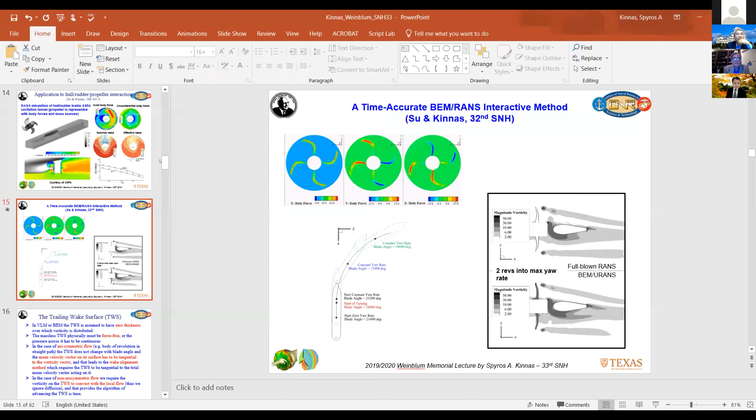Good morning, good afternoon, and good evening, everyone, all hydrodynamicists around the world. I'm very honored to give this lecture. I'm also very honored that I was selected to be the Weinblum lecturer of this year, and I thank the committee for this. Again, thank you for inviting me to give this lecture as well at the SNH.

So I'm going to talk today about the latest work we have done in predicting performance and design of marine propulsors and turbines. I have here the list of students in the last 10 years, about 23 of them. And I definitely appreciate the support of all this work by ONR, as well as the consortium on cavitation we have at UT.

So from propellers to propulsors, as you see here on the top left, we have a single all-type propeller, which started getting wider with skew, then started becoming more like sharp at the leading edge, surface piercing, contra-rotating, stator rotor, etc., ducted, tip loaded, and at the bottom end, at the right, I have a water jet, which is nothing else but another type of propulsor. So we try to model all these types of propulsors.

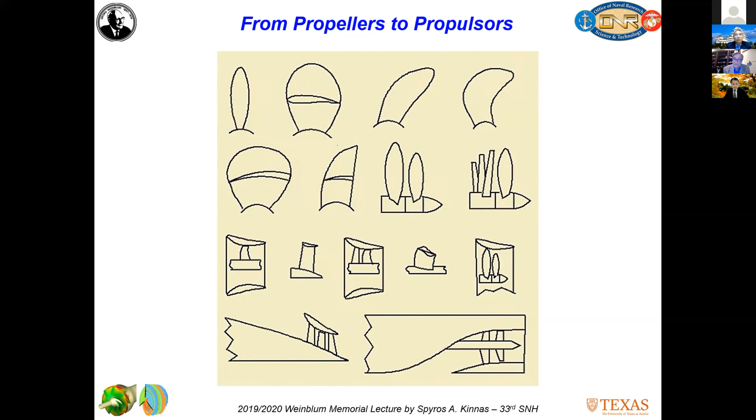Of course, there is a demand from bigger and faster ships, which means bigger, faster, more heavily loaded propellers. Cavitation is inevitable. Therefore, the design has to be balanced between cavitation and propulsor efficiency.

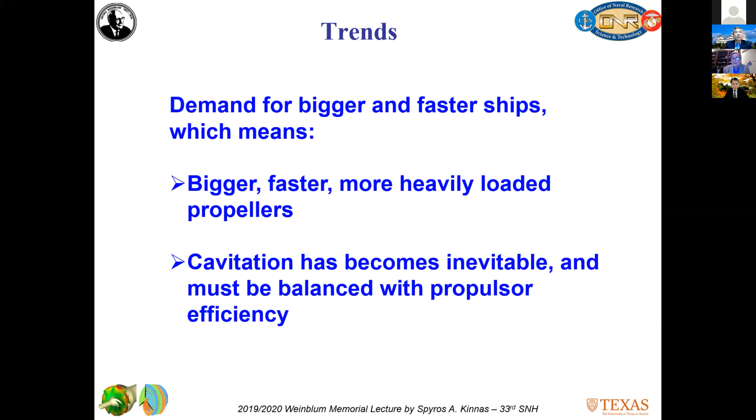So the computational methods that we have been developing, not only us, but everybody around the world, should be able to handle complex blade geometries, should be able to handle on and off design conditions, model all types of cavitation, be fast, because when coupled with design methods, trial and error systematic optimization methods, we have to have a fast tool to be able to turn in designs quickly. Should include interaction with hull or rudder or duct or hub or pod. And finally, the models should be able to predict propeller-induced hull pressure fluctuations as well as acoustic field far from the propeller.

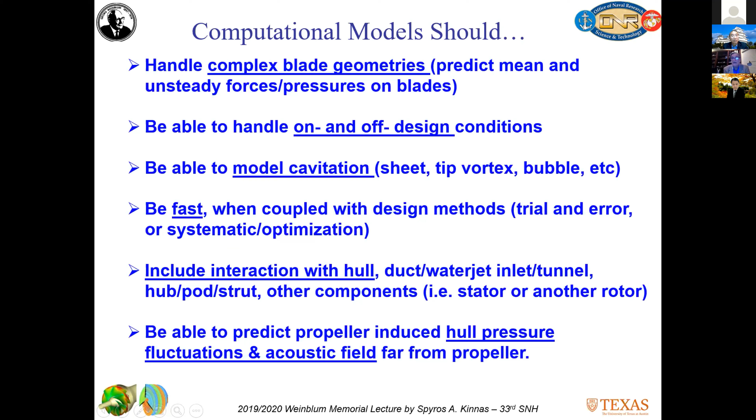So there are many, of course, flow models we can use. And here I list them for a hydrofoil. We have at the top RANS models or LES models. The hydrofoil is somewhere here, and we have to have a large domain so that we have inflow and outflow conditions that are not affected by the body.

We have, of course, boundary element methods where the boundary condition is satisfied on the surface of the foil. We have lifting surface, vortex lattice methods where the boundary condition is applied on the mean camber surface. And finally, we have single vortex where the hydrofoil is represented with a single vortex.

And this is the equivalent of lifting line method for propellers and turbines. On the top, we have a method which is definitely slower and more difficult to grid the space, as opposed to having faster methods at the bottom, which are, in addition to being faster, also easier to model, or to discretize the surface as opposed to the volume.

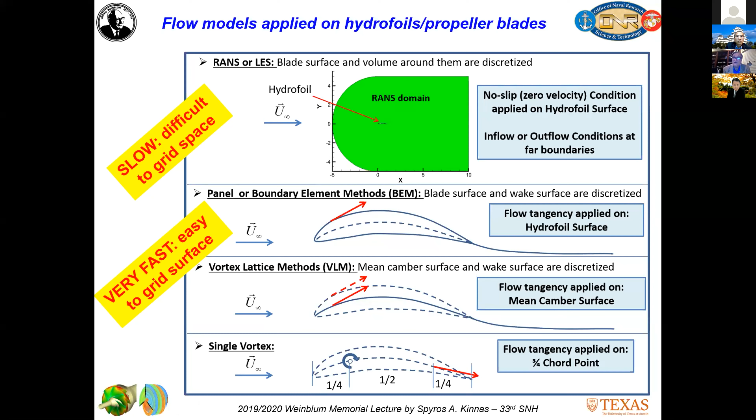So going down, I have here propellers on the top left, modeled with a vortex lattice grid, and we solve for the bound vortex of those boundaries that you see. Then the boundary element method, where we panel the blade, and we solve for the perturbation potentials, which are equal to the dipole strengths on the panels.

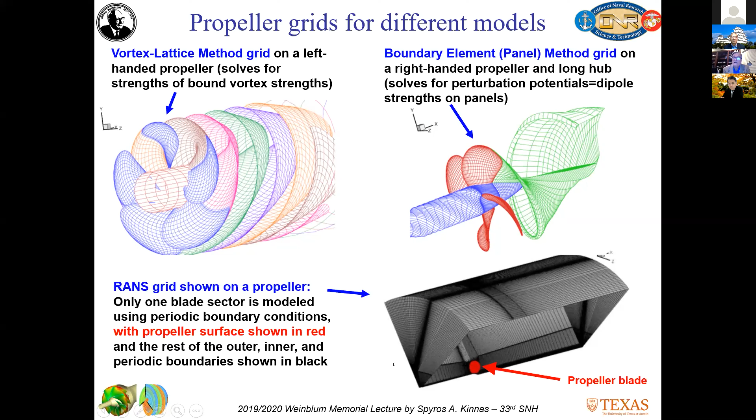And at the bottom, I have RANS, which solves for all these primitive parameters, velocities and pressure. In this case, you see a propeller in red, and you see the grid around it, which has to extend quite some distance in all directions so that the far stream conditions are not affected by the propeller. This is showing only one blade by using periodic boundary conditions.

Now, the advantages and disadvantages of the methods: the surface methods are inviscid, and the effects of viscosity need to be accounted for either by semi-empirical adjustment of the pitch and application of a friction coefficient, or via coupling with an integral boundary layer solver. In addition, vortex lattice methods do not include the effect of thickness, so a thickness loading coupling needs to be applied to make them closer to the boundary element method.

Of course, the finite volume or RANS and LES methods include the effects of viscosity inherently, but you have to be sure that you have enough resolution within the boundary layers that are developing due to the effects of viscosity.

Surface methods, panel methods, or vortex lattice methods need to approximate or determine the trailing wake surface, the surface of the wake, by using a wake alignment model. Finally, RANS and LES do not need to model this trailing wake surface, but in order to get it right, you have to make sure that you have enough resolution downstream of the propeller in the wake. That not only helps determine where the right surface of the wake is, but also helps reduce numerical diffusion.

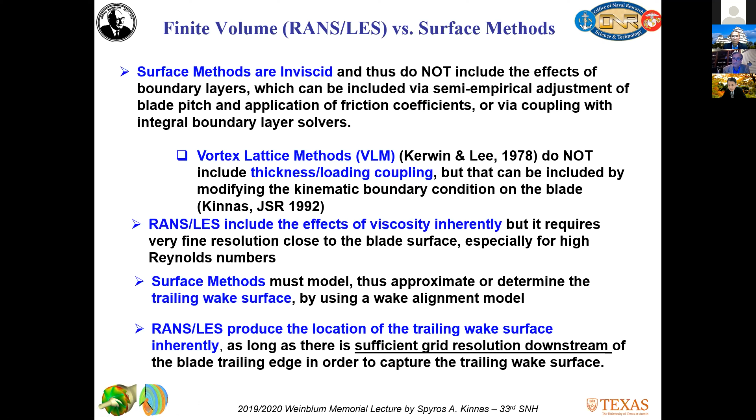So going down the list, in the boundary element methods that I primarily am going to present here, to solve the flow and evaluate the performance of a propeller, we need to know what the inflow is. Often the propeller inflow is measured or evaluated via CFD or via RANS.

This needs to be known behind the hull at the propeller plane in the absence of the propeller, and this is what we call the nominal wake. However, due to the hull-propeller interaction, in the end, we need to evaluate the so-called effective wake.

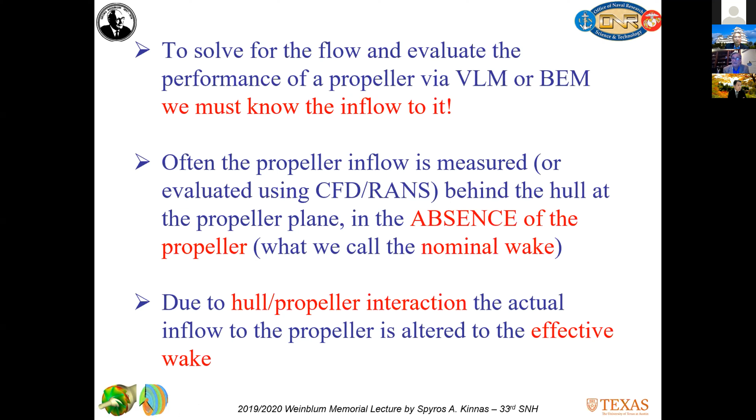For a simplistic understanding of why we have to evaluate the effective wake, assume that we have a non-uniform inflow coming with vorticity into the propeller blade. At point A of the propeller, the inflow would not be the one just upstream at point C. Due to contraction, it would be the flow somewhere above point C, at point B. Therefore, the effective wake is going to be different from the nominal wake. Again, this is a simplistic view.

And here comes a general definition of the effective wake: effective wake, on the left, is equal to the total wake, the total inflow, including the effects of propeller inflow, everything, minus the propeller induced component. So this is how we are going to evaluate the effective wake.

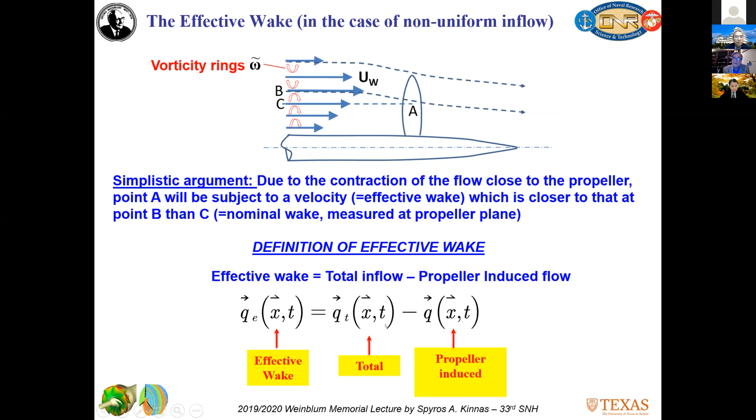So going down the list, before I show you any details, I want you to see the importance of having the effective wake. Here we have this propeller, I think it is 5168. And here we have a nominal wake shown on the left like this. On the right, I show the effective wake after an evaluation of that, as I show you in the next slide.

So the KT and KQ are first predicted by using full-blown RANS, then by using BEM with a nominal wake. You see that using a nominal wake, the KT is going to be 13% in error, and the KQ 11% in error. By using the correct effective wake, we're going to have a much smaller error, in this case less than 1% compared to RANS.

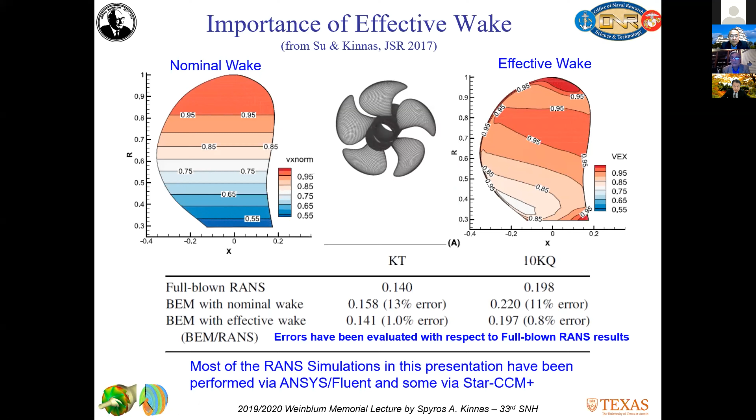So how do we evaluate the effective wake? As I said, this is the general formula we use. And this is a flow chart that shows how this is done.

We start with an initial guess of the effective wake field. Based on that, the BEM or vortex lattice method gives us the propeller perturbation flow, as well as the mass source and body force. With this body force, we run with sources equal to those body forces.

This run gives us the total velocity. Then by subtracting the propeller induced velocity from the total velocity, we get the effective wake. And of course, we go around that loop until convergence.

In order to properly evaluate the effect of the propeller within RANS, the propeller pressure forces need to be converted into body forces, and the propeller thickness needs to be converted into mass sources. Also, in this approach, we use time-averaged forces and sources to expedite the simulation.

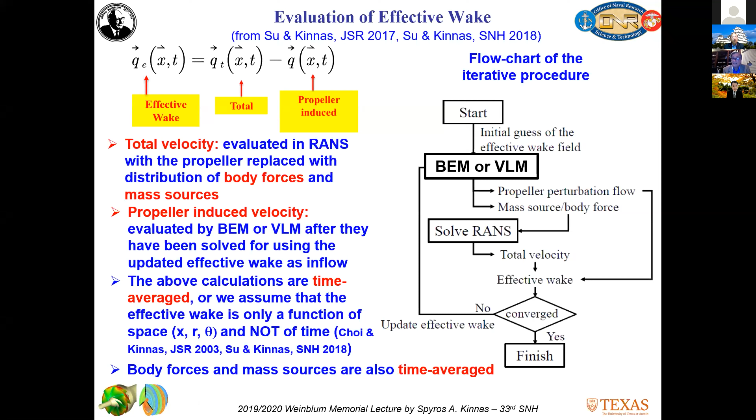Another important thing is where you evaluate the effective wake. Traditionally, we evaluated it somewhere upstream of the propeller blade, but most recently we decided the best approach is to evaluate the effective wake at the propeller control points, as shown here.

This is a case of a ducted propeller where the duct and the hub are handled using RANS, and the propeller is handled using a boundary element method. You see here where the propeller is, and here you see how the propeller is modeled with body forces within RANS.

What I show at the bottom right is the performance from experiment. As predicted, if we evaluate the effective wake somewhere upstream of the blade versus at the control point, you see that using it upstream of the blade, we definitely miss a lot, as opposed to evaluating it at the control points, where the simulation is much more successful. That is one lesson to learn from this.

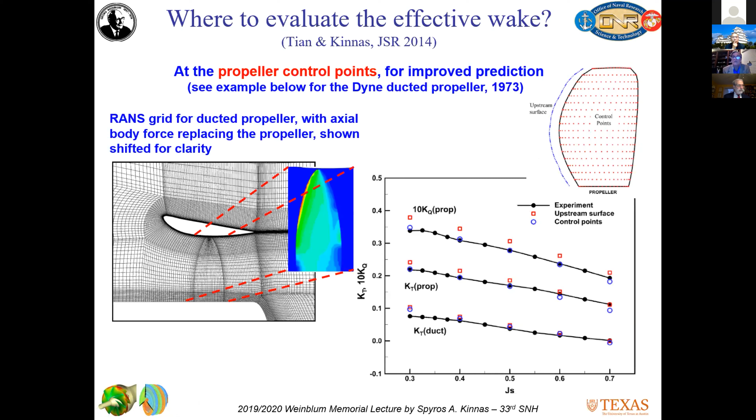We have applied that in the case of podded propellers. As you see here, two podded propellers, front and back, and here you see the body forces, the mass sources, the axial body force, and the circumferential body force. I wanted you to see at the bottom where we show the swirl velocity.

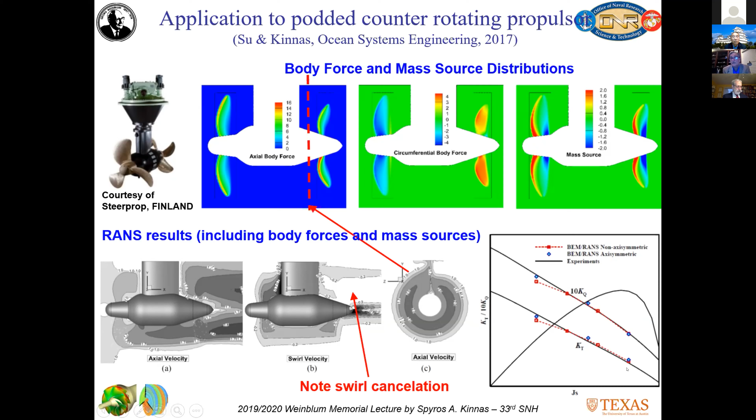It's a little hard to see, but the swirl downstream of both propulsors is quite minimal, meaning this is a good design, because downstream you want the smallest swirl so you get the best efficiency out of this podded propulsor. Here it shows the KT and KQ as compared with experiments.

Then we applied this in the case of a propeller working with a hull and a rudder, as you see here. We made comparisons of this with an experiment performed at SSPA, where they put this model inside the SSPA tunnel, a cavitation tunnel.

Here I want you to see the axial force and circumferential body force as predicted from the method, and also the nominal wake and the effective wake. I want you to see how different the two are from each other. Finally, the KT and KQ of the propeller are compared with those measured at the SSPA tunnel.

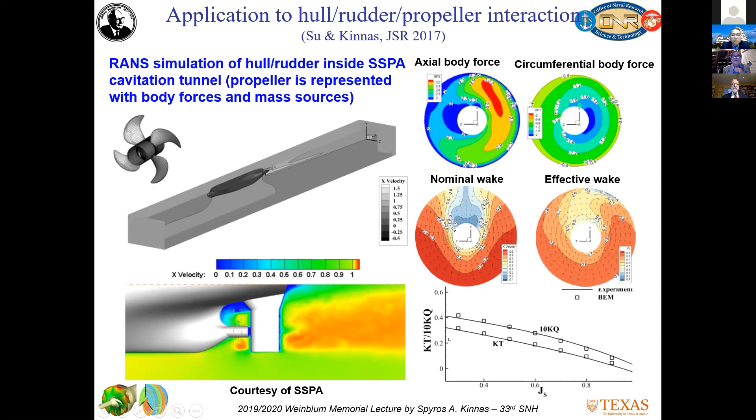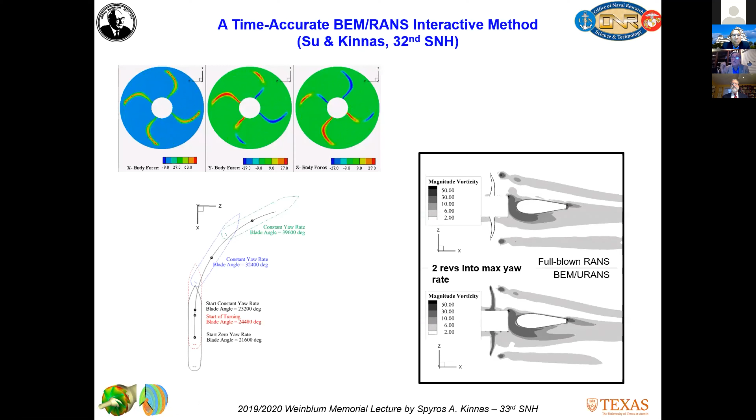This is in the case of a hull in maneuvering. Here we show the flow, the vorticity, around the rudder and propeller, behind the propeller, from full-blown RANS at the top, and underneath from BEM representing the propeller coupled with unsteady RANS. Our simulation seems to very well reproduce what would happen with the full-blown RANS, where RANS, unsteady RANS, actually applies to both the propeller and the hull.

Going down this, as I was saying earlier, the trailing wake surface is something that needs to be evaluated. Of course, the trailing wake surface has zero thickness. Since it is massless, it has to be force-free.

In the axisymmetric flow, we have to make sure that the mean velocity vector and the surface of the wake are tangential to each other. And in the case of axisymmetric flow, again, with the propeller, the velocity induced in the wake and the surface have to be tangential to each other.

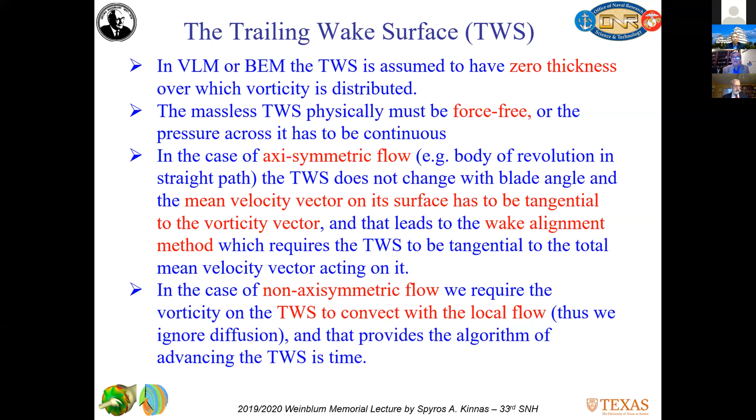In non-axisymmetric flow, of course, we require the vorticity to convect with the local flow. And we have done both of these, and I want to show you how important it is, first of all, to have the right wake. This is shown for a propeller.

I think this is 43, 48, if I remember correctly. This shows the performance, KT, thrust coefficient versus advance ratio, predicted from experiment with the crosses, from RANS in yellow, and from using full wake alignment versus using approximate wake alignment with an older method. And you see definitely you have to have the right location of the wake to get the performance right, as opposed to having an approximate model.

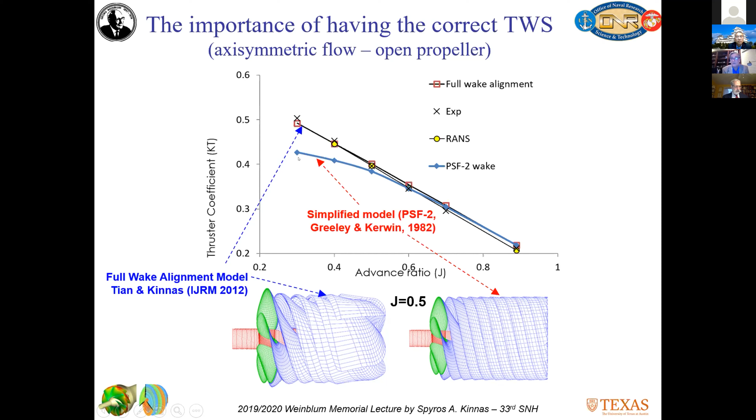So again, this is something we show even more pronounced in the case of ducted propellers, where if we align it using the propeller wake and all the technologies, the experiment is down here, and also RANS, using the full wake alignment. And here, if we use the simplistic alignment models for KT and KQ, as you see, we miss a lot by not using full wake alignment. So it is very important in the case of ducted propellers in particular.

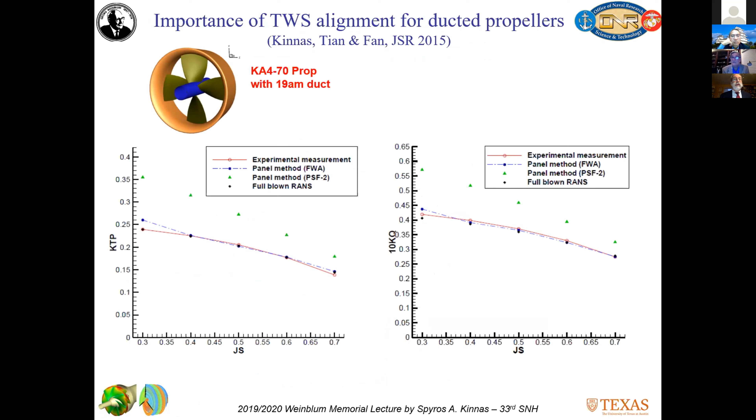And in fact, we push this model even further, where not only do we align the wake of the blade, but also the wake of the duct. I want you to see the dark lines here, showing how the wake alignment scheme from our method is able to predict the roll-up of the vortices. And as you see, it matches very well the location of the vorticity shown in color as predicted from RANS.

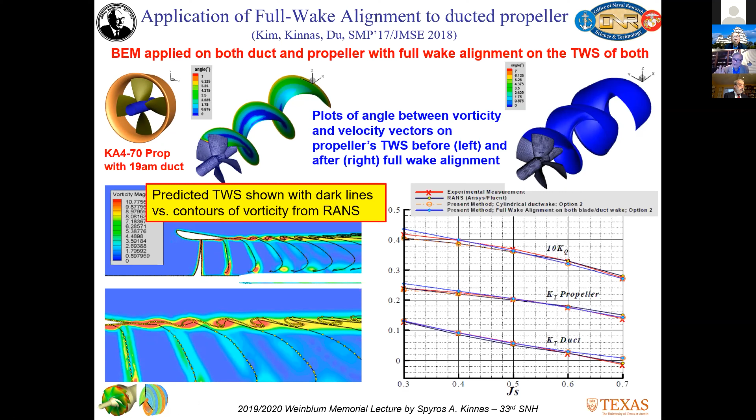And of course, the performance here from all these models, KT of the duct, KT of the propeller, and KQ of the propeller, are all predicted, I think, very well with all these models. So again, this is something important to emphasize one more time: having the right, effective location of the trailing wake is an important aspect in all these models.

And we did that in the case of a propeller in inclined flow, 10 degrees in this case. You see here in black, it shows the vorticity as the wake location predicted from our method versus the vorticity plot coming from RANS.

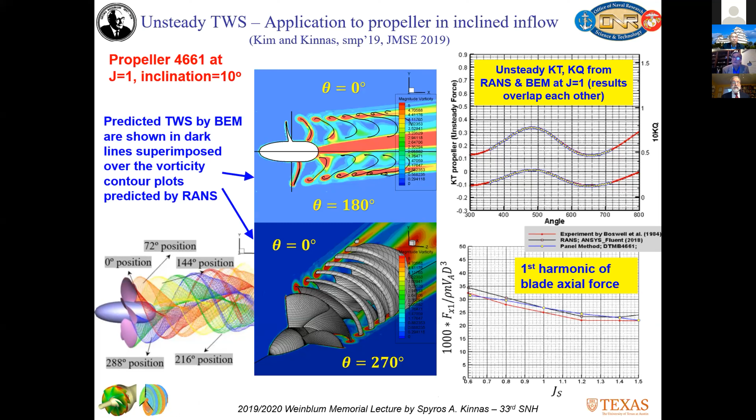This shows again the flow, and on the right, it shows the KT predicted from RANS and from BEM, which is going to be unsteady because we have non-uniform flow. And I want you to see how well RANS and BEM agree with each other. And of course, finally, they also agree with experiments where we look at the amplitude of the first harmonic of the axial force. So we're very happy to see this.

And finally, it is important to include the effects of boundary layer as well. We have done that by coupling the method with XFOIL, but a modified XFOIL, where XFOIL, of course, is a two-dimensional method. The way we applied it, we took all the influence coefficients of XFOIL at a blade section and replaced them with three-dimensional influence coefficients, in other words, three-dimensional sources and dipoles.

But this is not enough. We also had to take into consideration the effects of the other sections on the blade, as well as other sections on other blades. And all of that, of course, helped us achieve better correlations.

Here, the top figure on the right is a little hard to see, but essentially this tells you RANS, full wake alignment with boundary layer, full wake alignment only, and simplified wake alignment with boundary layer, all these approaches. In the end, as you see down here towards the trailing edge, this is a blow-up of this. You can see from here that the most successful of all is when we have full wake alignment and boundary layer corrections together.

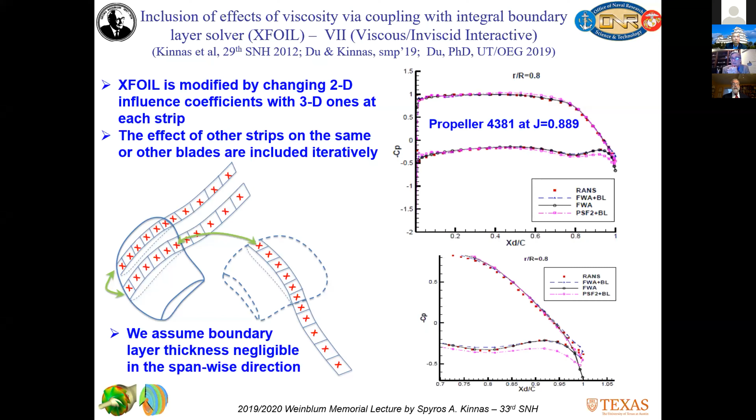So again, all of these things show that having the wake right and having the effects of boundary layer, using this sort of three-dimensional scheme where you take into account the boundary layer sources on other sections and on other blades, is the best approach. And here I show you, for one more time, two other propellers, 4381.

RANS is shown in red, and here shows full wake alignment plus boundary layer in blue, and all simplified wake alignment with boundary layer. Obviously full wake alignment with boundary layer is more successful.

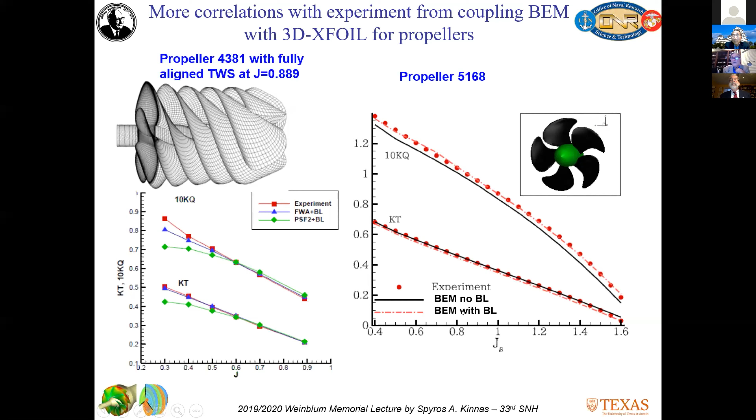Here also is shown for propeller 5168, where the experiment is shown with red dots, boundary element method with no boundary layer is shown in dark line, and in red line, boundary element method with boundary layer corrections. Obviously this is the most successful of all.

Then I'd like to go quickly into a new extension we have made in our panel method in order to handle not only sections with sharp trailing edge, which is often the exception rather than the rule, but also sections with blunt, non-zero thickness trailing edge, round trailing edges like that, or trailing edges like that used for anti-singing. So how do we do that?

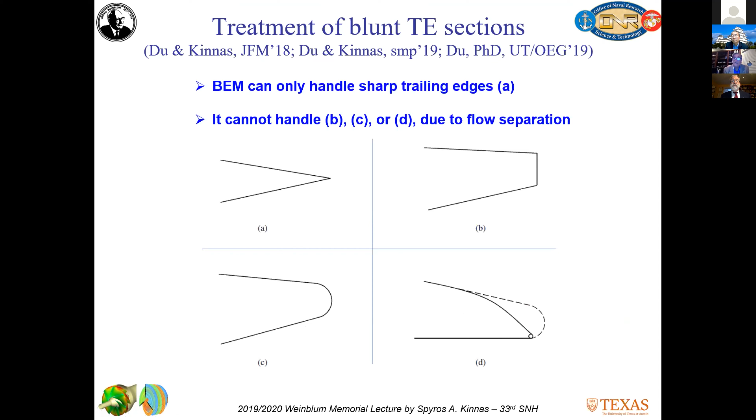Through a Newton-Raphson scheme, Newton's second scheme, we are able to impose the following conditions. First, we want the lift of this extension to be 0. Also, we want the moment of this extension to be 0, which is one way of saying that the pressure distribution over this extension is constant, something verified by RANS runs and also in experiments.

Then points A and B are determined via coupling with XFOIL, the boundary layer code, where we make sure that the CF at point A and point B is equal to 0. In other words, where we have separation, where CF is equal to 0.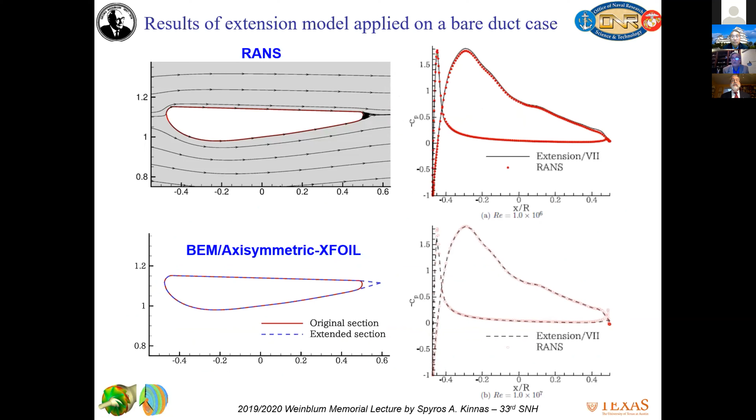Here it shows the pressure distribution at the top for Reynolds number 10 to the 6 and at the bottom 10 to the 7. You see the correlation is very good between the pressure distribution from our method and from RANS. So we were very happy to see this.

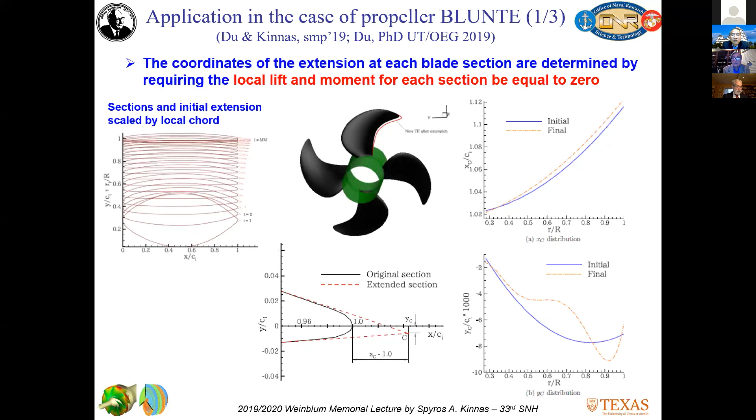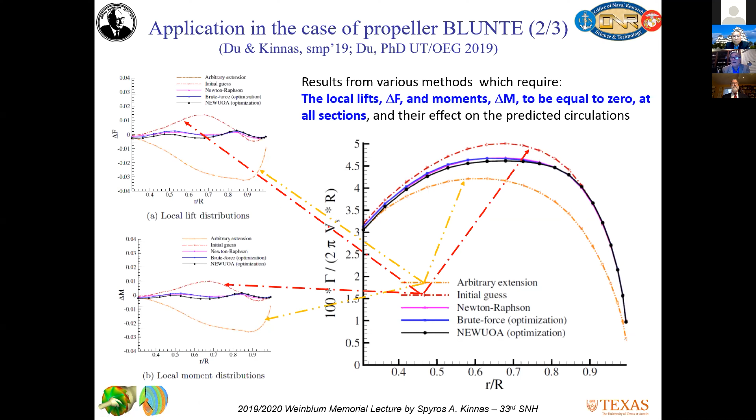I should tell you, we have to be very careful with this blade. These blade sections with round trailing edge are difficult to model in any type of method we use, even within RANS. Because as I told you earlier, you have to make sure the trailing wake is modeled properly. In this case, since we use an O-type scheme, it's very hard to have a trailing wake modeled sufficiently at a sufficient distance from the trailing edge.

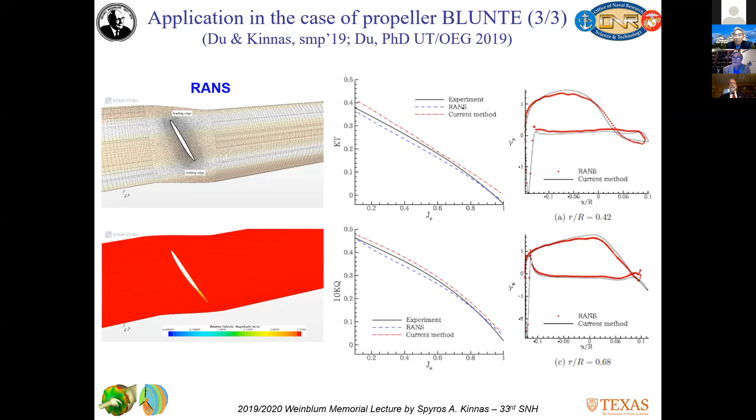So again, using Star CCM Plus and our method, we have here the KT from experiment in a solid line. The current method using this extension scheme is a little bit above; RANS is a little bit below, and the same with the KQ. Here it shows the pressure distributions from RANS and from our method. Again, they are not on top of each other, but they are close enough. I think more work needs to be done to make sure we get closer to the experiment from both methods.

So then I'd like to go further into how we model the effects of cavitation. We model cavities with boundary elements, with panels, and we require the pressure of the cavity to be equal to vapor pressure. The method is able to determine unsteady cavity patterns, fully unsteady, not quasi-steady. And the method allows for mid-chord cavity detachment, as well as cavities on either or both sides of the blade.

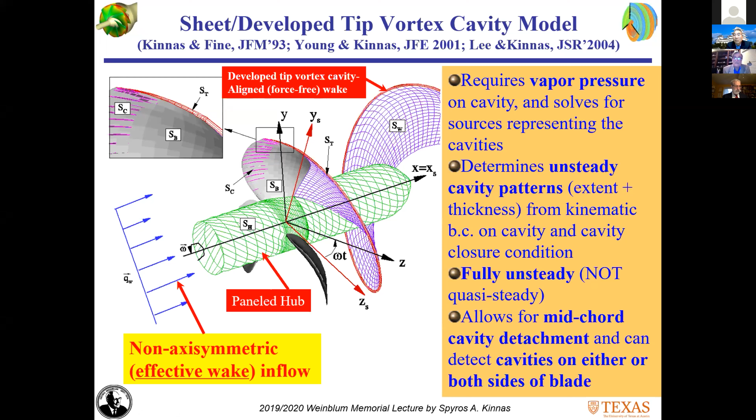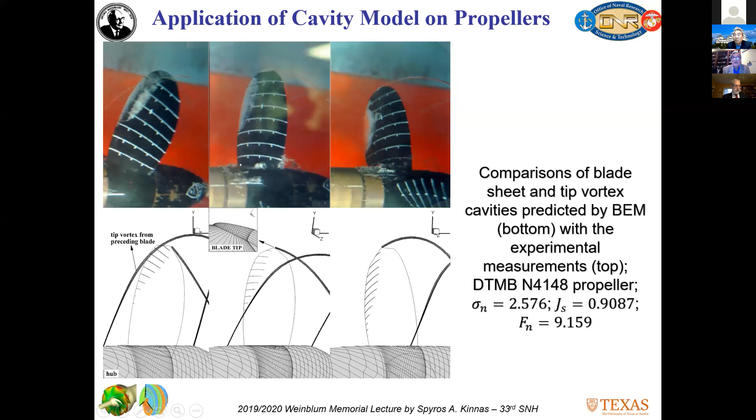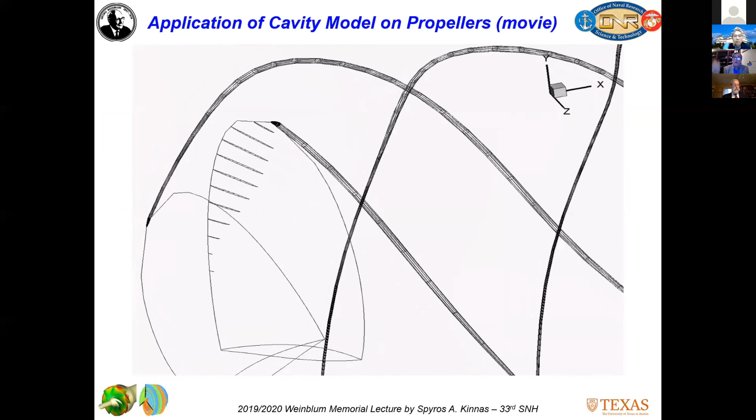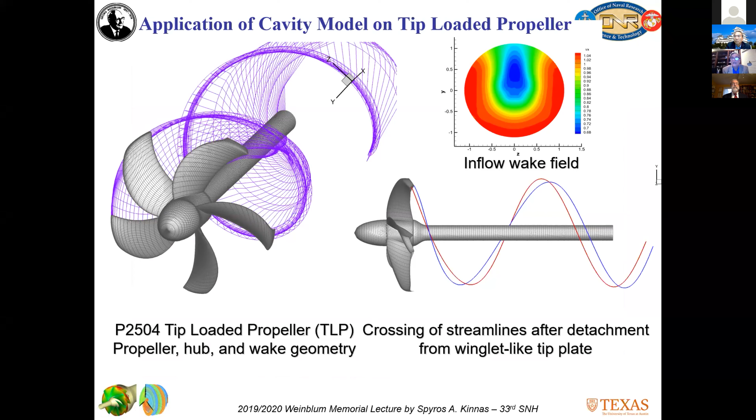So let me continue from this. We have applied this to tip-loaded propellers. I wanted to show here, we have two vortices coming from the knuckle of the tip-loaded winglet, and from the tip of the winglet, like that.

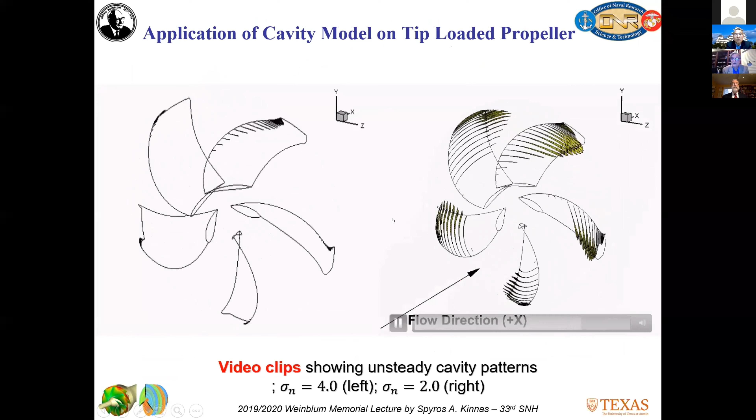And here I have again some movies that show you the predicted cavitation at a higher cavitation number on the left and a lower cavitation number on the right. Let me continue with this.

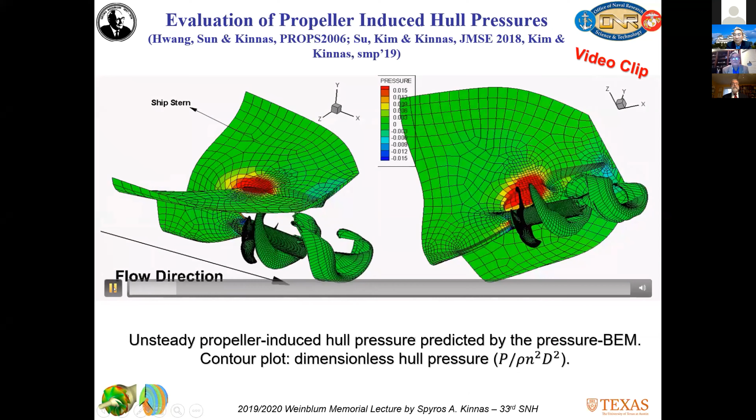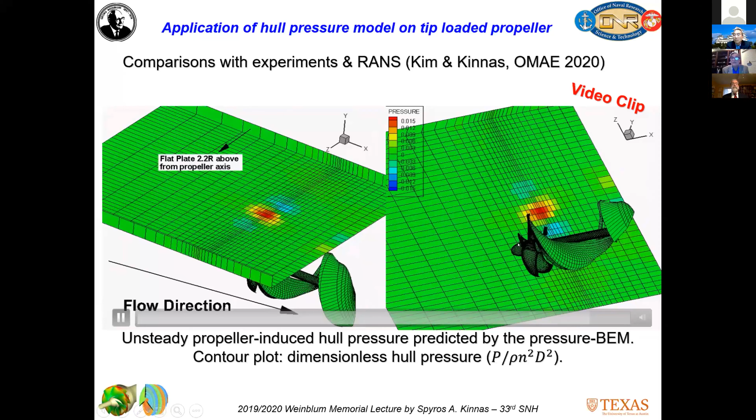This shows prediction of the pressures on the hull, and I wanted to see how well the wake of the propeller is modeled on this. So I'm going down here. This is now for a plate, propeller-induced pressures on a plate. And you see the tip-loaded propeller in this case under it. That is an experiment performed some years back.

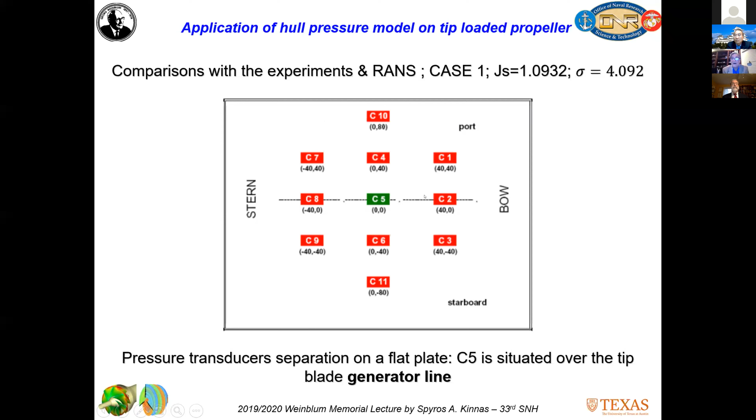In the next slide, I want you to see at all these points on the plate, this point in green is the point just above the propeller, and these points are towards the stern, and this is towards the bow. In the next slide, I'm going to show you predictions versus measurements of the induced pressures on the hull.

In red, you see RANS. In black, you see BEM. And the experiment is shown with circles. I think I find this a successful correlation, both for BEM and for RANS.

So then we were very happy to see this. Again, this is shown for all the points.

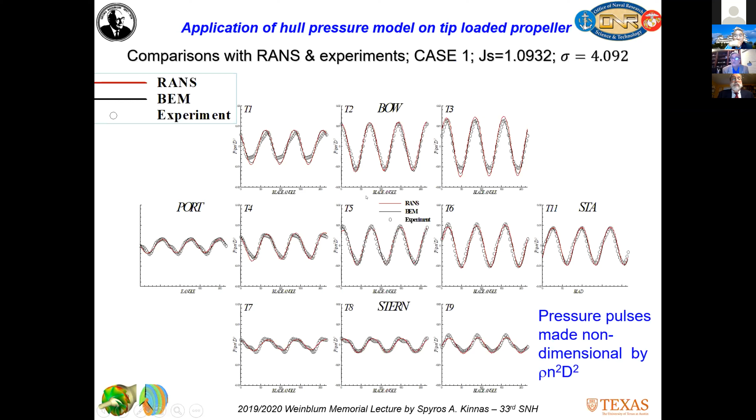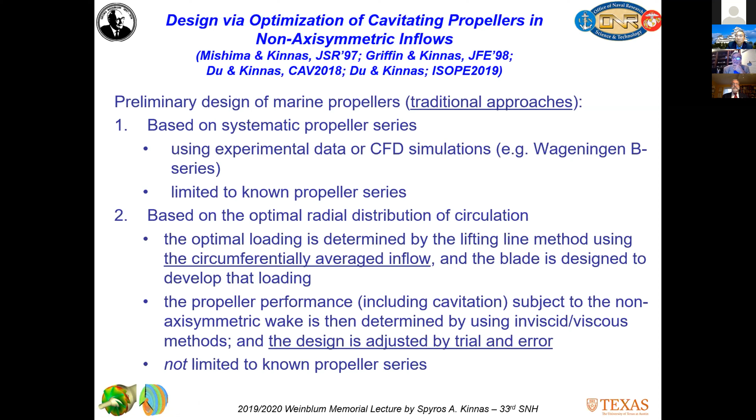Now I would like to go very quickly through how we have used that in optimizing a propeller - in other words, design via optimization. This is something we have carried out long ago. Our approach here, instead of using systematic series like Wageningen or other types of series to design propellers, or more sophisticated methods that use lifting line method to design the propeller blade loading and then design the blade geometry to adjust to that loading, we use a different approach: actually designing the propeller in the actual inflow, where the circumferential variance of the inflow and the effect of cavitation are considered within the design process, not after it. There is no need for trial and error, okay?

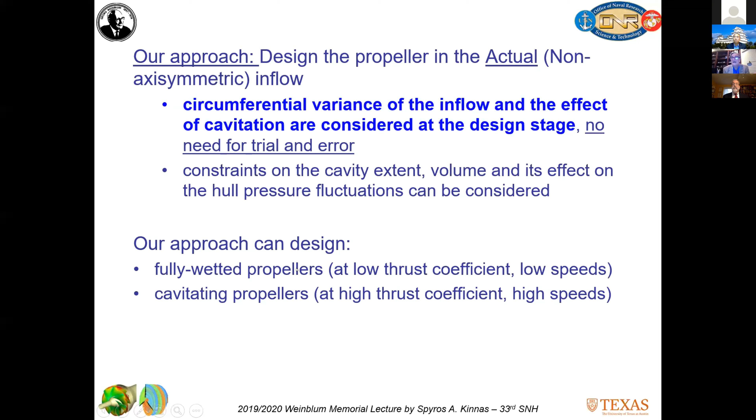And we can put, of course, constraints on cavity extent, volume, and its effect on the hull pressure fluctuations. Our approach can design either fully wetted propellers at low loadings or cavitating propellers, and I'll show you examples in just a moment. How do we do that?

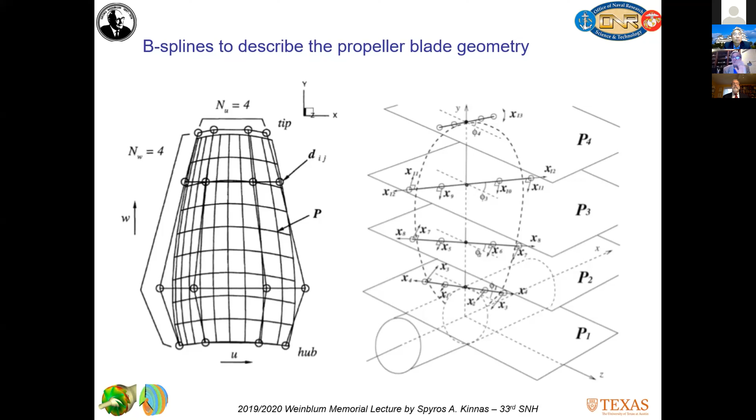Well, we model the propeller with a B-spline polygon, as shown here, most of the time a 4x4 B-spline polygon. The location of the vertices of that polygon - usually 13 or 16 variables - are the variables that we need to determine in order to determine the shape of the blade, okay? And that means the pitch as well as the camber, okay? Not the thickness - that is given. So how do we do that?

Well, we have developed, as shown here at the bottom, a constrained nonlinear optimization based on an augmented Lagrangian penalty method, something we developed more than 25 years ago, where we minimize the torque for a given thrust, KT, with given - if you like - maximum cavity area, in the case of a cavitating propeller, or in the case of a fully wetted propeller, requiring the minimum pressure to be a little bit below the cavitation number so that it doesn't cavitate. Again, this constraint is given as an inequality constraint.

And most recently, actually, we imposed another inequality constraint that requires the pressure at the bottom of the blade to be greater than the pressure at the top of the blade. This actually allows us to avoid negative loading and the presence of face cavitation, which quite often can be bad - detrimental, if you like - in terms of erosion.

I'd like to show you a couple of examples here. In the case of an inflow shown like that, with a KT which is 0.35, with J which is equal to 1. And in this case, I should say the model that we use is a vortex lattice method, MPUF-3A, the method that we have. One thing I went over very quickly here - I should say X is nothing else but this 13 or 16 variable vector that we need to determine.

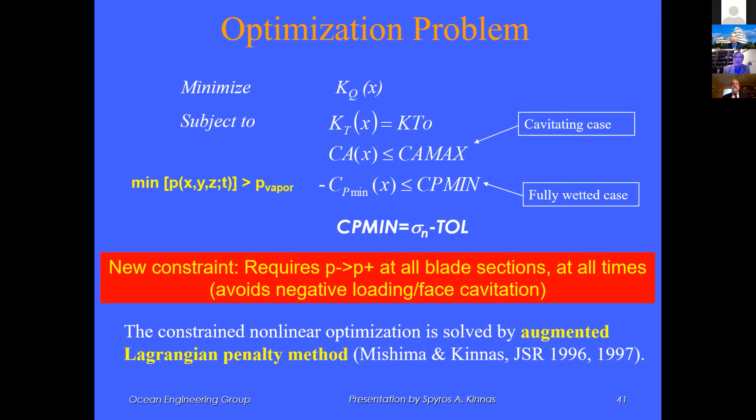Now, how do we determine KQ and KT? Well, by using MPUF-3A, running it consecutively and interpolating from previous MPUF-3A runs the KT and KQ. So again, by using a linear interpolation in the beginning and then a second order Taylor interpolation, if you like, so that we have a better interpolation within previous MPUF-3A results. We can do that also with the panel method, but I'm only going to show you results using MPUF-3A within this model, which we call CAVOPT-3D.

So the inflow is non-axisymmetric in this case. And from this run, we require the cavity area to be less than 30% of the surface of the blade. We required, and we got, as I will show you in a moment, a blade with cavitation in it. The eta that came out of it is 72.5%. So now I'm going to show you the cavity patterns, and the maximum is again about 30% of the blade. Again, of course, it changes as we rotate around.

And here I want you to see the convergence history. I want you to see that KT and KQ, in the beginning, vary very violently. This is good - we like that because we would like our design method to go through a variety of possible solutions. So it is good, but eventually it converges into a solution that does not change with number of iterations. I should tell you how important it is to have a fast tool in this case, because with about 600 MPUF-3A runs, it took about 1.5 hours with one CPU. So that was very, I think, good to see.

And then what we did - we required a constraint of 60%. We allow more cavitation.

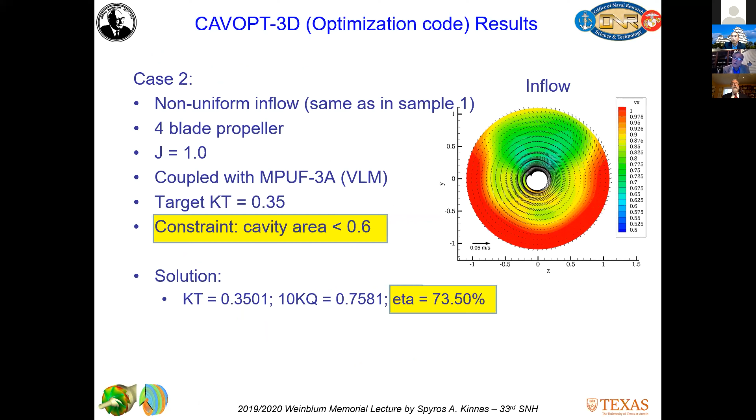In this case, we get an eta which is a little bit higher, as expected. The more cavitation we allow, the more efficient the blade is going to be. This is something we knew from the past, but now we see it quantitatively with the tools we have. And this, of course, has more cavitation as expected.

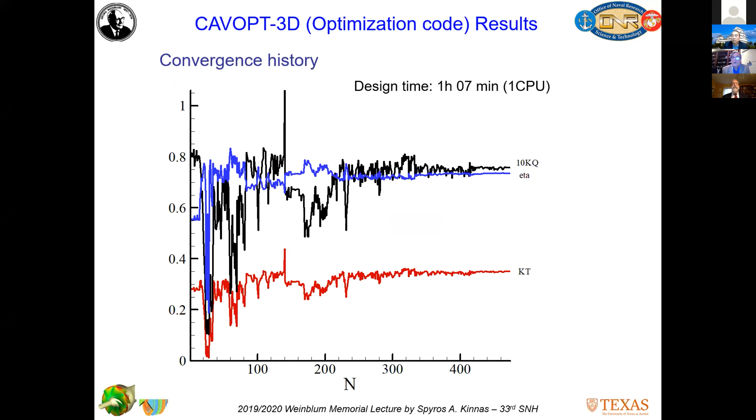This is, if you like, the convergence history for this second run. Finally, I'm very close to the end here. I would like to tell you that we have started looking into designing now a propeller.

In this case, for an axisymmetric body, so that the propeller is able to push that body at a certain speed. Now, the situation here is we don't know the inflow to the propeller, and also we don't know what the thrust of the propeller is. So what we need to do is start with a given inflow, which can be, in this case, the inflow that corresponds to the speed that this body needs to go with. Then, based on that, we design the propeller to have the best efficiency by using CAVOPT-3D.

But then once we design it, we need to put it back into our model, where now we use RANS coupled with MPUF-3A in order to find the interaction of the hull with the propeller. And that interaction not only provides the correct inflow to the propeller, but also gives the correct resistance of the hull.

I want you to see here, when we start, the propeller thrust over here, the design for which what comes out has a KT which is too low. The resistance in this case is too high, and eventually the two converge until in the end we have the thrust equal to the resistance.

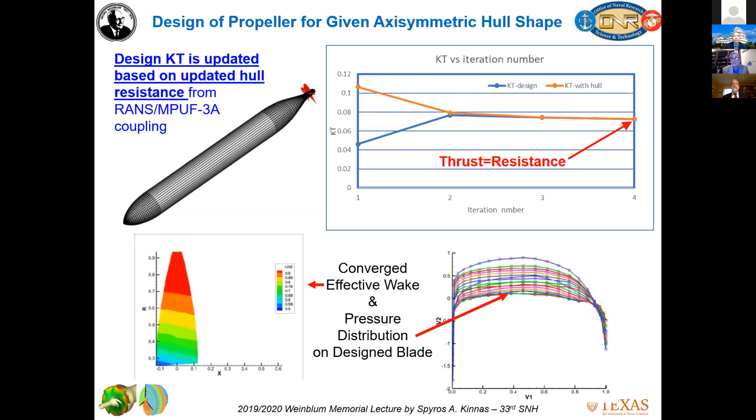I would like to show you the convergence history. Again, as I told in the beginning, we have very big excursions, but in the end we have convergence. Here I'd like to show you a movie that shows how the blade design with the iteration converges to the right one. Towards the end of the movie, you will see the blade not moving anymore because it has converged.

Let me play it one more time. You see it playing in the beginning, until finally it converges to the correct design. Again, we were very happy to see this. This is progress, I think, that makes us happy. Of course, there are always issues that we try to fix with our methods, and we keep making progress.

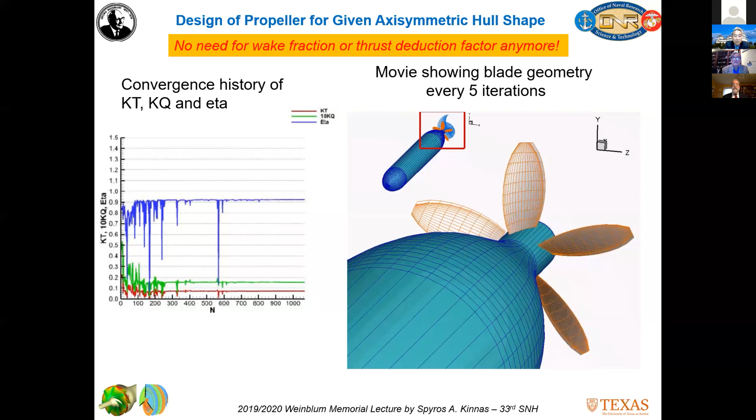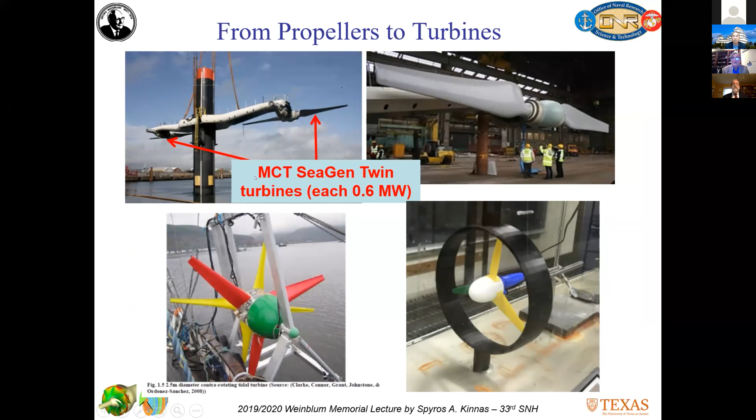Let me now tell you very quickly about turbines, which is nothing else for us but another blade. You see here different types of turbines, counter-rotating turbines here, SeaGen over here, and one that we have designed.

A propeller is the same thing as a turbine. There is some difference in terminology. In propellers, we use the advance ratio. In turbines, we use the tip speed ratio. And the two are related through this magic relationship: TSR times J is equal to pi.

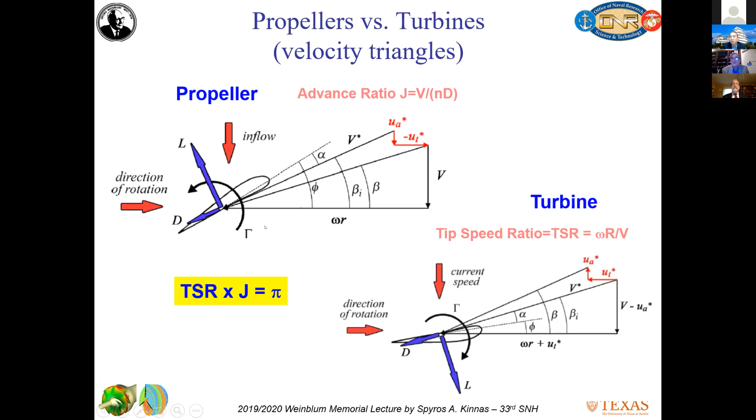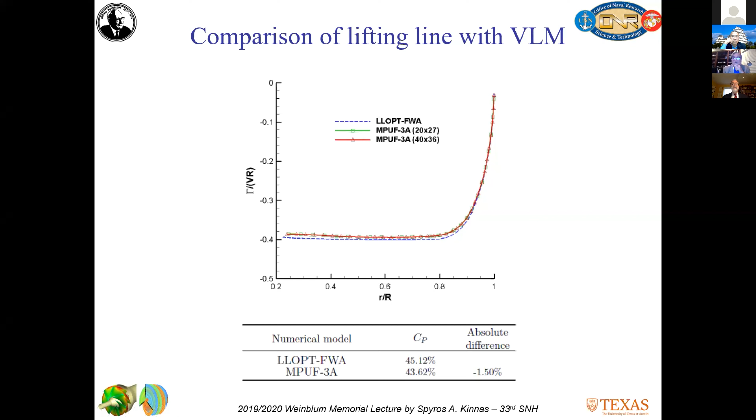Because the turbines usually work at very low pitch, you have to have a lot of turns of the wake and a very big length of the wake in order to predict the correct effect of the wake on the blade. So it's even more important than for the propellers.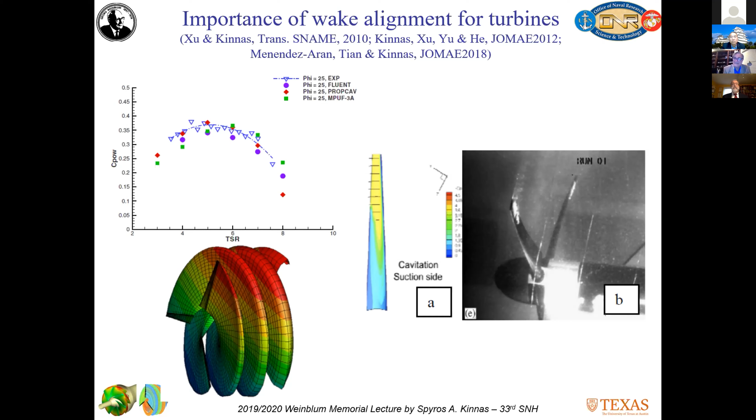This is shown in the next slide, where we have applied this full wake alignment model on a lifting line model that we have developed. You see here the Betz limit that we all know is 0.593 something, and here is what we get from applying this lifting line model, where we use a traditional lifting line trailing wake model, as opposed to applying a full wake alignment.

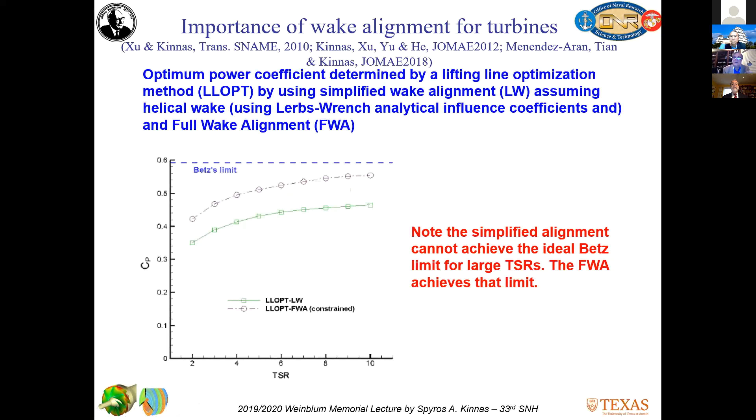I wanted to show that now, at the limit of high TSR, we approach the Betz limit, something we were not able to do before. That was a big mystery, not only for us, but for other people that work on turbines. So wake alignment is even more important for turbines.

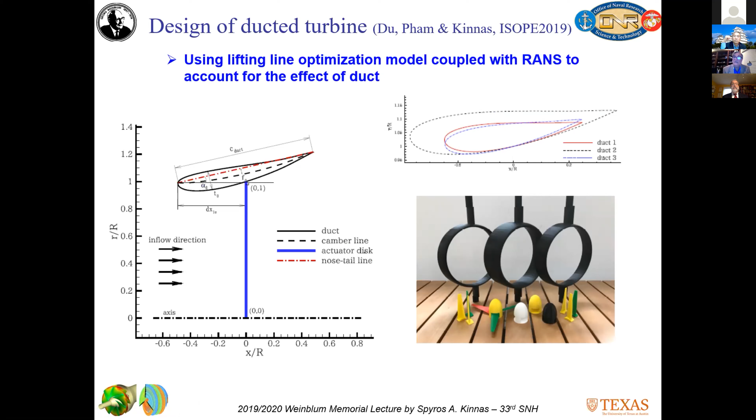Finally, I wanted to show you an exercise we did at UT. This was a project conducted by my students in my undergraduate senior level class of ocean engineering, where we used the lifting line model to design the duct as well as the propeller blades. We designed and tested all these ducts that came from our design method, different ducts, different blades as you see here. All of these were printed at the three-dimensional printers we have at UT, and the students tested them. I wanted you to see this in the next slide.

Here we show the power coefficient for different duct lengths. In this particular case, you see the bigger the length of the duct, the bigger the power, also depending on the angle of attack. I want you to remember the angle of attack is defined as positive in what we call the opposite direction. And you see it has to be a diverging duct.

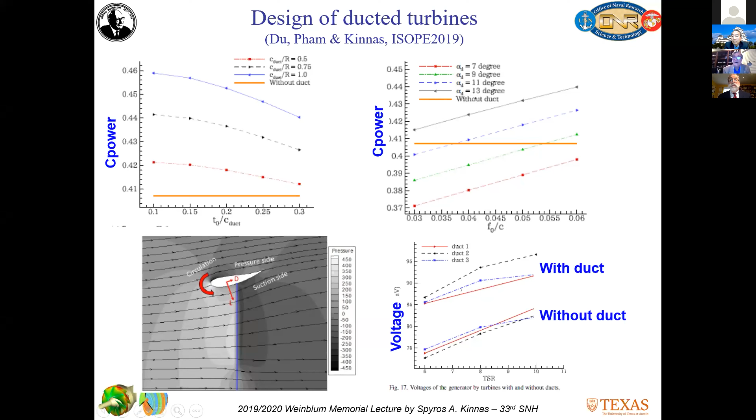In the end, by doing all these experiments with the duct, we found the voltage that came out of this, because we connected it to a generator. The voltage with the duct came out higher than that without the duct. Let me show you this experiment we did, with the propeller in the flume.

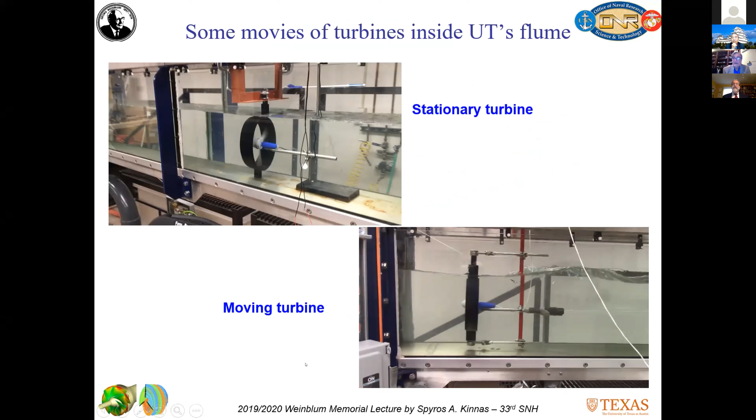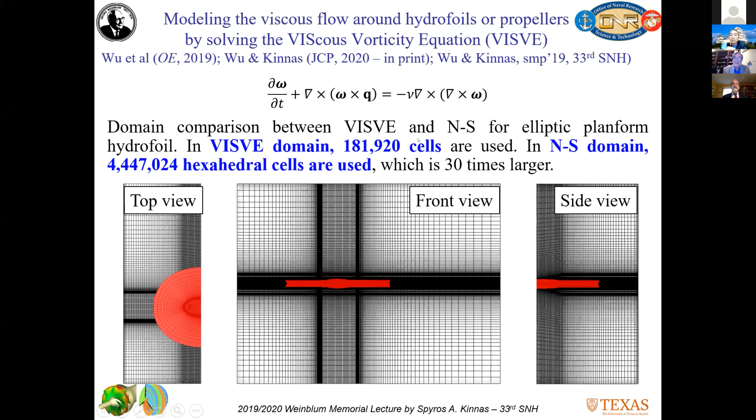Very quickly, and this will be the end, we have also made a big effort to develop a new method that takes into consideration the effects of viscosity. We call this VISVE, using the vorticity equation, which is capable of, instead of using a traditional RANS method with a larger number of elements, 1.5 million cells, solving the vorticity equation only around the blade, allowing us to do it with much fewer cells. You can see more about that in the presentation Thursday morning by my graduate student, Mr. Wu.

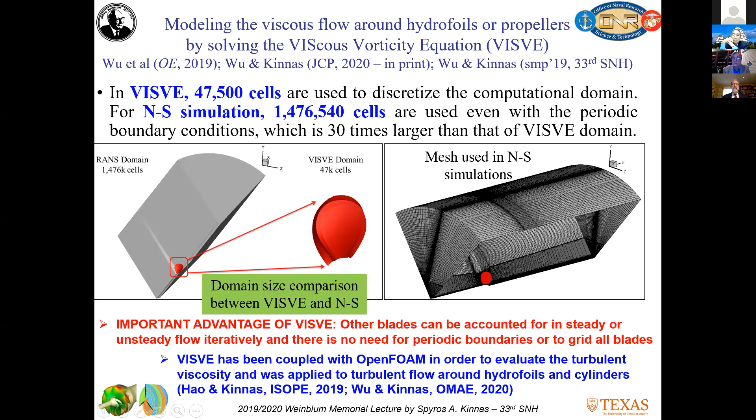And this is the end. What we would like our group to do more is model the developed tip vortex cavitation and its effect on the hull pressures. In fact, we have done that, and we got some very encouraging results where we are able to predict higher harmonics better now, and this is shown in this presentation.

We'd like to evaluate the acoustic field, and we have started doing that using the Ffowcs Williams-Hawkings equation. We'd like to apply VISVE, this new method we have been developing, to the case of turbulent propeller flows and cavitating flows. We have already done this in 2 dimensions. Finally, we'd like to further test PROPCAV with the effects of the hull and apply it to the design of propellers for ships, ducted propellers, and counter-rotating propellers. So all of these are the future challenges we'd like to attack.